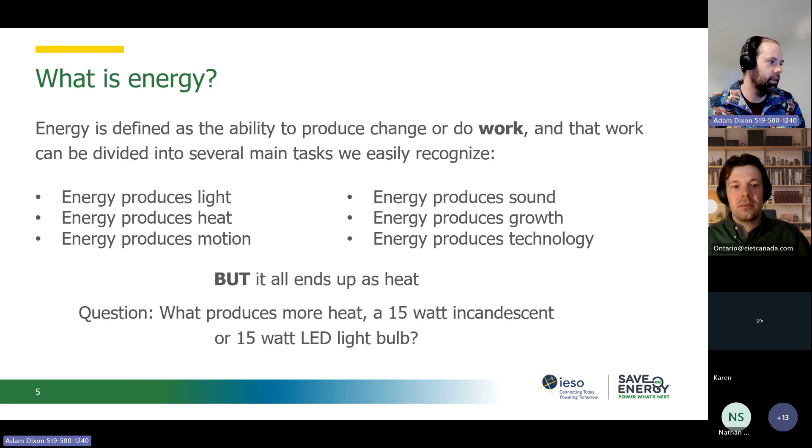Okay, so moving on. So I mentioned the law of conservation of energy: energy cannot be created or destroyed, only transformed and transferred. So this manifests itself into our energy systems here: oil burns to generate heat, the heat boils the water which turns to steam, the steam turns a turbine, the turbine turns an electric generator, produces electricity, gets transferred to your homes or your businesses, and then it powers the lights, and the lights give off light and heat in that example.

So that's one example of the whole energy system, and again, everything ends up as heat at the end of the day. Even at the first step here, the oil burns to generate the heat, there's losses in that system as well. So it's a big balanced system in terms of the higher level picture there.

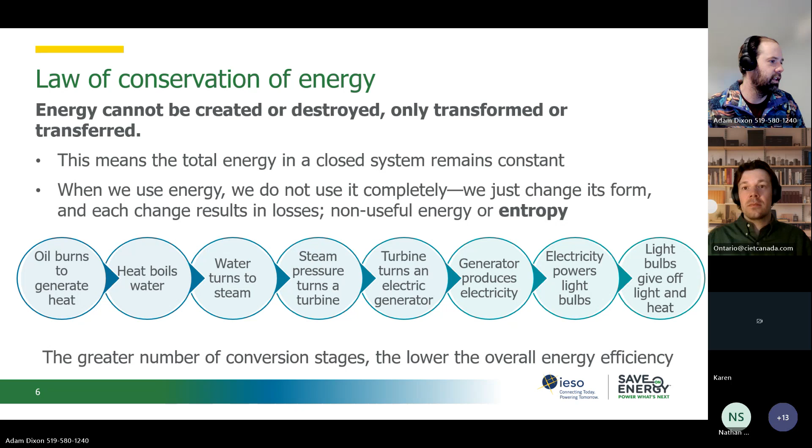There are other forms of that as well. So energy systems: there's the fuel getting burned, primary energy, power plant, it's then distributed to the end use. So there are losses at each step along the way. And actually, to account for some of these losses, if you look at your electricity bill, there is somewhat of a multiplier in there to account for how far away you are from the primary source of energy.

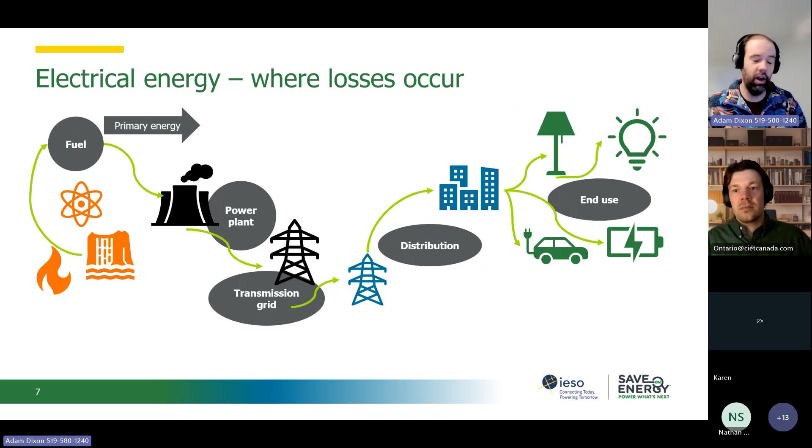So if you're ever looking at your energy bill and you see one kilowatt hours and you see another kilowatt hours and you're billed for the higher one, that is a bit of a true up. It's a simplifying of how it works, but a true up to account for those losses throughout the system.

So, different forms of energy. There are many different forms. The main two here are kinetic energy, which is energy of motion, energy in action, like the light from a lamp or the steam from a kettle, and potential energy, which is energy stored to be released, like energy from a battery or cutting wood for your fireplace.

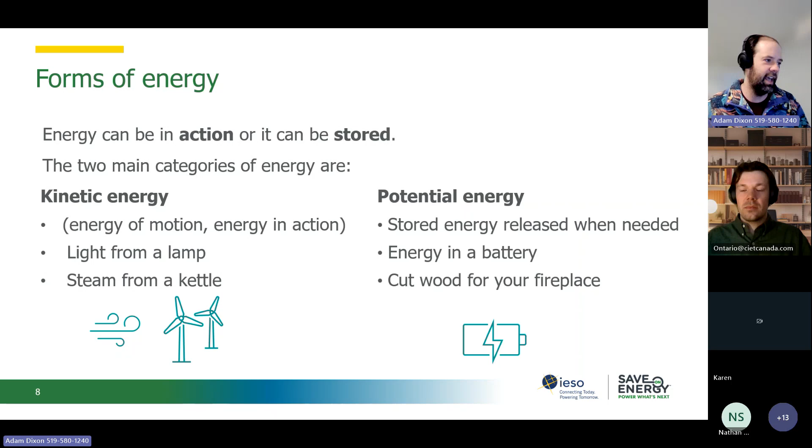The potential energy in the wood is the wood itself. When you burn it, the energy is released. That stored energy is released when needed, which can be as simple as when you're hammering a nail into wood. The hammer has potential energy in its mass, and when you swing it, you produce kinetic energy. I'll get to the final step of that equation at the end.

Kinetic energy can also be thermal energy, related to the temperature of an object and the total kinetic energy of its particles, radiant energy, or electrical energy, produced when moving electrical charges. That's probably the one people are most familiar with.

Then we have potential energy, such as chemical energy stored in the bonds between things, which is released, nuclear energy, and gravitational energy as well.

The final piece we're going to put together here is mechanical energy. I've tried, as much as possible throughout this webinar, to bring in simpler real-world examples as opposed to more complex energy system ones. So mechanical energy is the last one - it's the sum of the kinetic energy and the potential energy in a physical system.

Bringing it back to the hammer example: the hammer itself is the potential energy, then the kinetic energy is the swinging motion. The mechanical energy is when it actually hits the nail - the force applied to the nail to drive it into the wood. So summing those up gives the amount of force applied to drive that nail into the wood.

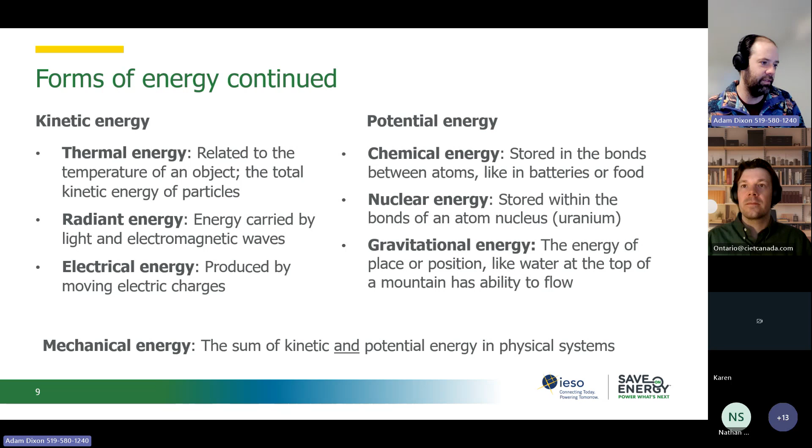Now what we're going to do is get into some more energy-specific terms you may have come across when working with energy in your building. I have a bit of a matrix here, built up over time, to dispel some of the myths and misunderstandings around energy in our buildings.

So we have a table here with two sides. We're going to build them up together and see how they relate to each other. One term you've probably heard of, whether at home or in your business, is kilowatt hours. Is anybody able to tell me what symbol, what function, goes between kilowatt and hours to get kilowatt hours?

Is it division, multiplication, addition, or subtraction? Someone feel free to speak up or type in the chat there. This one is oftentimes misunderstood.

Multiplication. Yeah, that's exactly right, David.

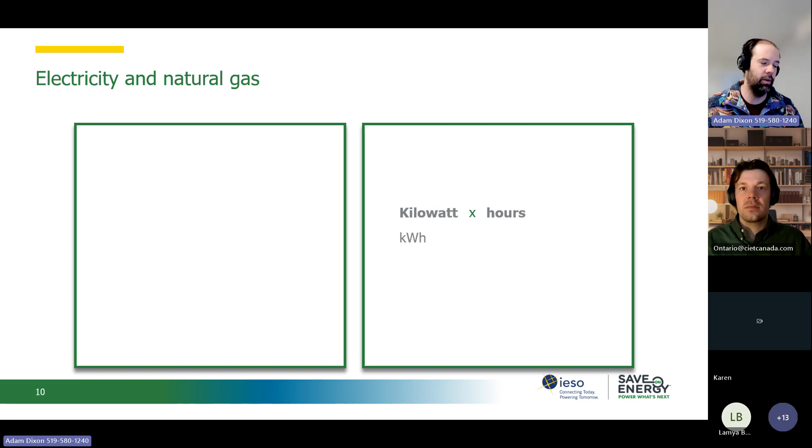Now, a kilowatt hour - oftentimes people equate kilowatt hours to kilometers per hour in your car, as a speed. It's actually not that; it's somewhat the opposite, but it is multiplied. It's kilowatts times the number of hours that the device or energy system is actually using electricity.

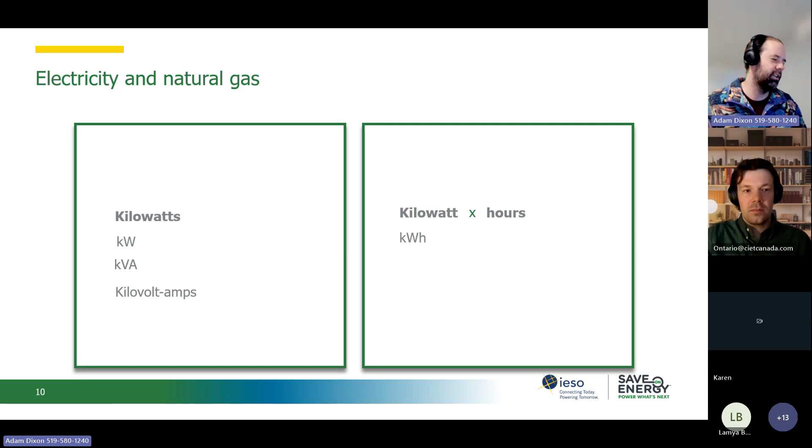This is another, I'd say more advanced thing you may come across on your energy bills. It's used to calculate power factor, which we're not actually going to get into in this course - it's a bit more advanced. So don't worry too much about kilovolt amps, part of this general, kVA. Depending how you're billed in Ontario, you'll see kilowatts and kVA, and you're maybe billed for whichever is higher, because the IESO or your local utility wants to have quality electricity. But I'm not going to get into the details of that right now, just to not confuse people.

So if you divide your kilowatts by your kVA, this gets your power factor. Power factor is designed to account for the losses in the energy system to get it from generation to your building. So without getting into too much detail, power factor is accounting for the losses in your building.

Next thing you may come across is horsepower. So 1 horsepower equals approximately 746 watts at 100% efficiency. If your motor is not efficient, it's not going to be 100%, you'll see a little bit less than that if you actually measure it. But 746 watts by definition is 1 horsepower.

So back on the right hand side, we have our kilowatt hours. This is actually our consumption - how much of something we are using. Also referred to as energy. Here, this is demand - the speed at which we need something. Essentially, I like to explain it as the size of the pipe required to get the energy to your building.

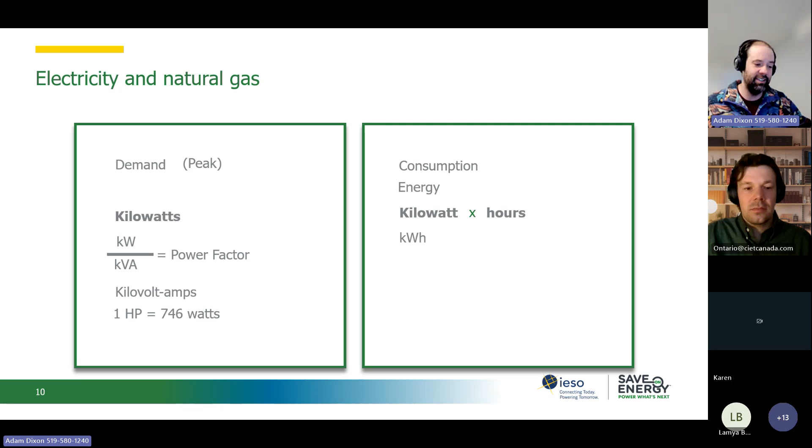If you look at your bill, and you're on anything above a commercial residential thing, you're going to see a peak demand. On top of your consumption in kilowatt hours, you are billed for your peak demand because you are influencing the size of the pipe that is required to get that energy to your building. It's also called power - you may come across that term. So the demand.

Electricity and natural gas - this is on the left-hand side. This is, I want someone to fill in the blank: this is how something, and on the other side we're going to have how something else. Anybody able to fill in the blanks there? So it's actually, as I've mentioned before, it's how much. And this one is how fast. And this is how much.

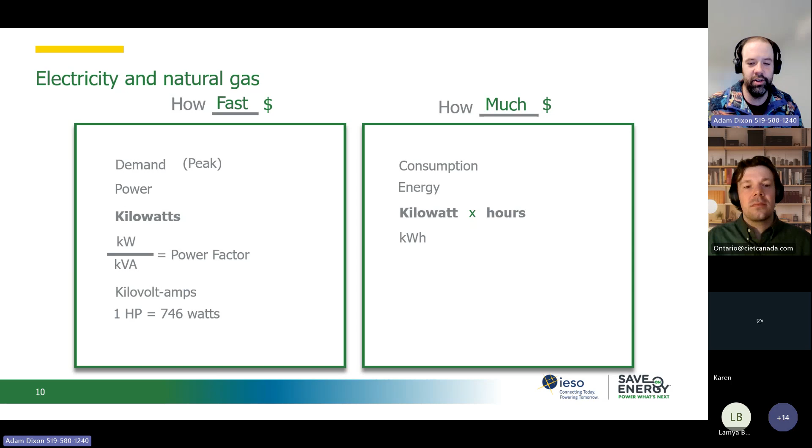A good real world example of this is an analogy I use - actually the other day, because people keep talking about AI in the energy world, I used ChatGPT to come up with some analogies for these things. So kilowatt hour, a good analogy is a water faucet. The kW, kilowatts, is the rate of flow at which the water is coming out of your tap. The kilowatt hour is how much water is collected - if you had a bucket underneath it, it's how much water you collect over a specific time. So another real world example to wrap your head around these things.

Moving on to when the price of that is determined, somewhat based on when you use it. On the kilowatt hours side, the consumption side or how much side, when you're residential, which you may be more familiar with, you have your time of use rates - your on-peak, off-peak, and mid-peak rates, so 3 different rates. When you get into commercial, industrial, Class A, Class B, it's a bit different.

It's more tied to your demand, and in your demand it also matters when that happens. Without getting into too much detail, depending when it happens, there's the 5 top peaks, as they call it. You're billed for your contribution to those 5 top peaks - the 5 top using days in Ontario, your peak demand, you're billed for that peak demand. If you are a Class A, Class B, or a bigger building, we're not going to get into the details of that - there's entire 1-2 day courses on how to understand those bills, so don't worry too much.

I would suggest going out and looking up how to do some training on understanding Class A, Class B billing—how fast, times how long, equals how much.

Often when it comes to energy, the 'how long' is actually the most important factor when controlling energy and getting into energy efficiency. Sometimes you can have a massively large load, but if it's not running for a large amount of time, it's not actually going to cost you that much.

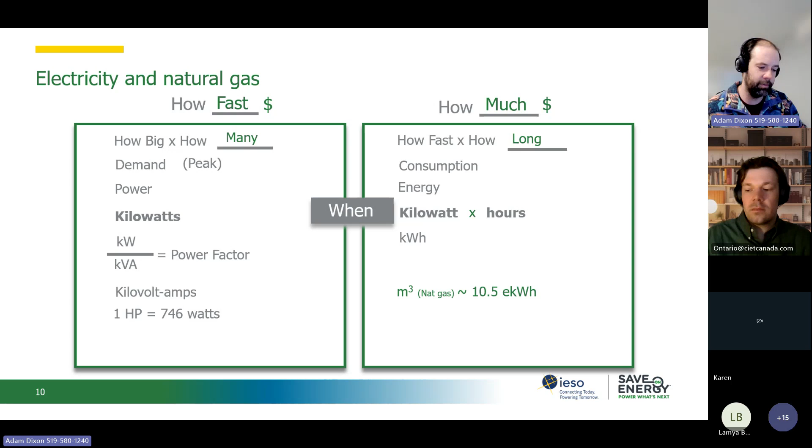Switching fuels here a little bit—I know we're mainly concentrating on electricity, but all the energy systems interact, so it's important to understand natural gas. In Ontario, you're billed in meters cubed, a volume of natural gas. In that one meter cubed of gas there's approximately the equivalent of 10.5 equivalent kilowatt hours.

One of the things that intimidates me still to this day is memorizing all the conversion factors between different fuels. Don't worry too much about it—there are lots of different tools out there nowadays to jump between them, and eventually over time you will memorize those.

So 1 kilowatt hour—another unit you may come across is a BTU, which stands for British thermal unit. Acronyms are one of the things that still to this day I struggle with—not just in the energy world, but in our world in general today. There's about 3,400 BTUs in 1 kilowatt hour.

The next units you may come across, depending on your jurisdiction: joules, kilojoules, megajoules, and maybe more commonly gigajoules. Often if you're outside of Ontario—in British Columbia, for example—gigajoules is how you see your natural gas on your bill.

Now the next thing—going back to the left side—we have 1 ton. You may have an air conditioner at your house that is about 3 tons, and that's 1 ton of refrigeration. That's actually the ton, if you're wondering, that comes all the way back to when we cooled our houses with blocks of ice. So 1 ton of refrigeration is the rate of heat transfer—it's not an amount of heat.

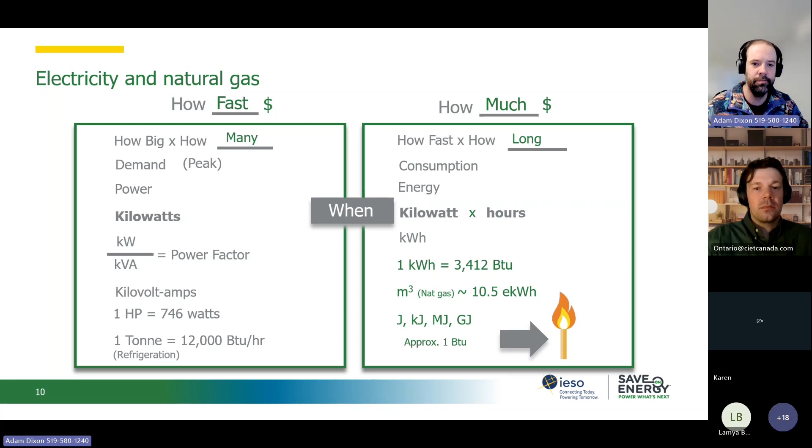So in order to generate 1 kilowatt hour—and I like to explain this because we often think of a kilowatt hour as a very small amount of energy, or even an expensive thing for the amount of energy we're getting. We talk about the price of energy going up, but to liberate the amount of 1 kilowatt hour of energy, you would have to strike 3,400 matches in 1 hour.

I forget the math on how many that is per second, but I don't think I could do 3,400 of anything in an hour. You'd basically have to swipe all those matches in one hour to make 1 kilowatt hour. So it's not necessarily as small a unit of energy as we think. I know we use a lot of them, and at 10 to 20 cents a kilowatt hour, that kind of justifies the price a little bit.

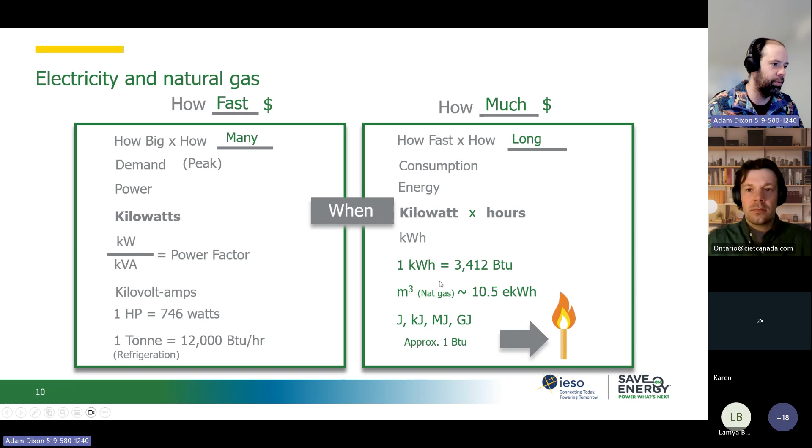Calculating power and energy is just another way of reading things, depending on how you like to look at it. I know that table can sometimes be confusing. Volt amps is volts times amps. Watts is volts times amps times your power factor. Your power factor, as we saw before, is watts divided by volt amps, and kilowatts is watts divided by 1,000. So power factor again describes the losses in the energy system, such as the electricity distribution system. I think we're quite familiar with that at this point.

Energy equals power times time, and kilowatt hours equals kilowatts times hours. I think the key, if you're going to dive into this, is to look at your house. You can get a lot of data from your utility on your house, and you can buy a lot of little things relatively cheap to track energy if you're interested.

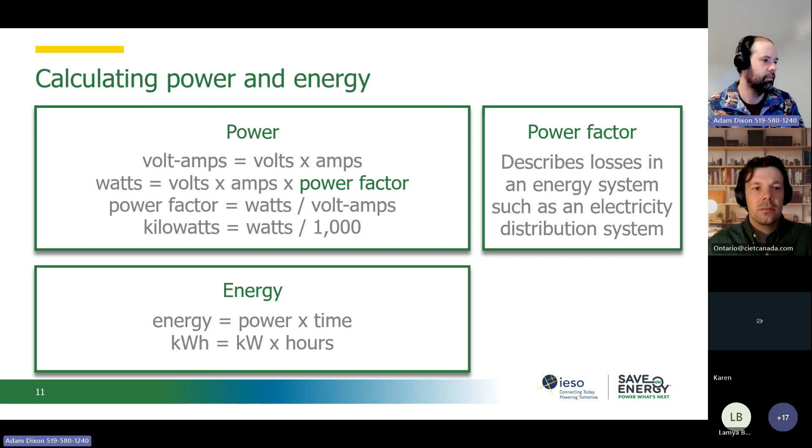I think I have it sitting here, or I might have moved it—a little power meter I bought a few years ago. It's about $40. I can plug it into my wall, plug my coffee maker into it, and measure electricity. I have another one that's a bit more advanced, about the same price though. It'll actually track the energy over time, so I can see the demand. There's also smart plugs and things like that to help control those hours. But concentrate on the hours if you're going to dive into analyzing any amount of energy in your house. I have a few analogies later to talk about that.

So units of energy, continued—I'm not going to spend too much more time on this. We mentioned horsepower, British thermal units, energy, joules per second. So it's speed—how fast and how much are the keys to that. Kilowatts is how fast, kilowatt hours is how much. If you're going to take anything out of today, and if you're new to energy or not confident in your energy literacy, that's something to write down.

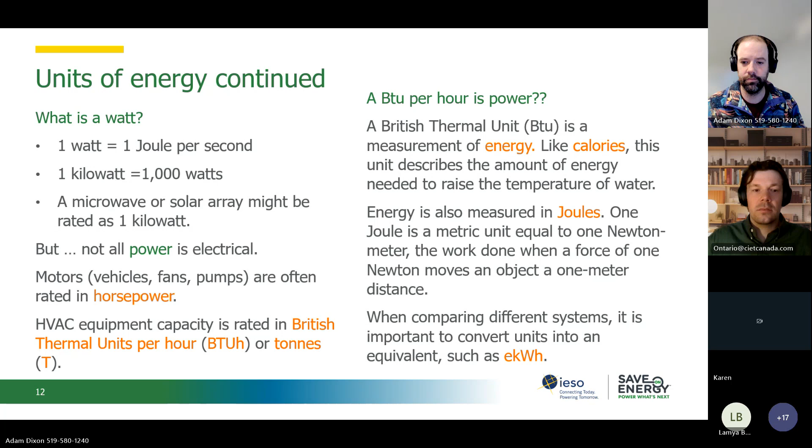We have a question in the chat asking if power factor can be described as another way of knowing the efficiency of a system. Generally, I'd say that's somewhat of a simplification, but yes—in the entire energy system from source to sink, which is your house, there is somewhat truth to that, but it's a little more complicated than that. There's no values on the power factor itself—it's a unitless conversion, a unitless number.

Demand is a little bit different. Typically it's in kilowatts, as we've mentioned, and what we want to look at most of the time is our peak demand. Peak is the biggest amount of demand we use in the building over one 15-minute period. Someone said 1 is ideal for power factor, which is correct. I think ideally in a larger building, anything over 0.9 is pretty good—that's what you want to look for in your building. If you're below that, the utility may contact you to do some things to deal with it.

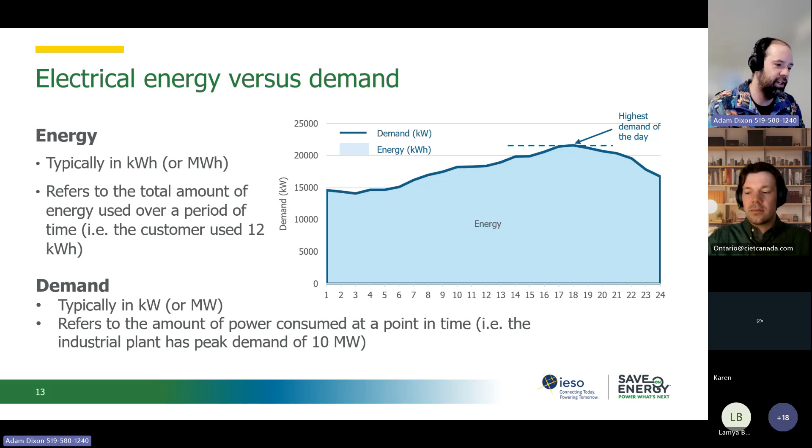So I have a little bit of a problem here. We're going to go through this to understand how demand affects your energy bill. It's not just how much you use, it's how fast you use it, because that's how the system needs to adapt to supply energy to your building. You may be hearing more about this in the news regarding adaptability of the grid as we electrify our buildings and add more EV chargers. As we become more reliant on electricity in Ontario, demand is becoming more important. So let's understand the cost and price of electricity.

So what happened there? Upon investigation, they used 15 kilowatt hours more at 10 cents a kilowatt hour, which would equate to about $1.50 extra in charges. But they had a 60 kilowatt heater that jumped on at a certain point for 15 minutes, and that set their peak demand. So they had 60 kilowatts and were charged $6 a kilowatt.

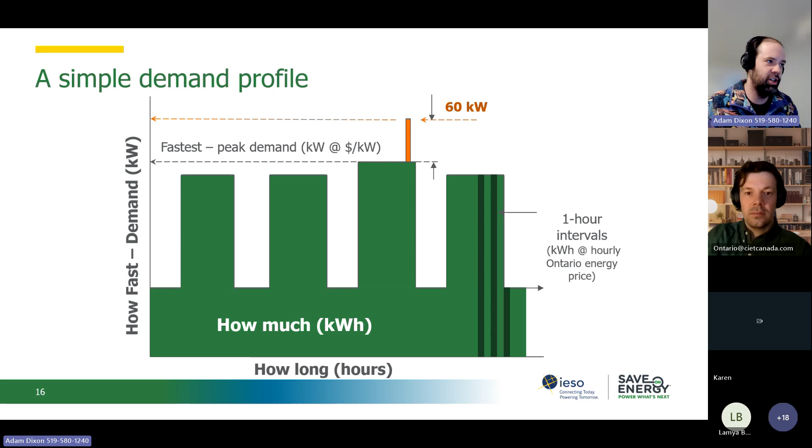If it's actually done in one of these valleys, it's kind of a non-issue - you'll pay a little bit extra for the actual usage, but you won't pay any more for the demand. So being careful of when large loads come on in your building is one way to manage energy in your system. On a residential or small commercial level this isn't much of an issue, but in bigger buildings this is a major issue - the majority of your bill is actually on your peak demand.

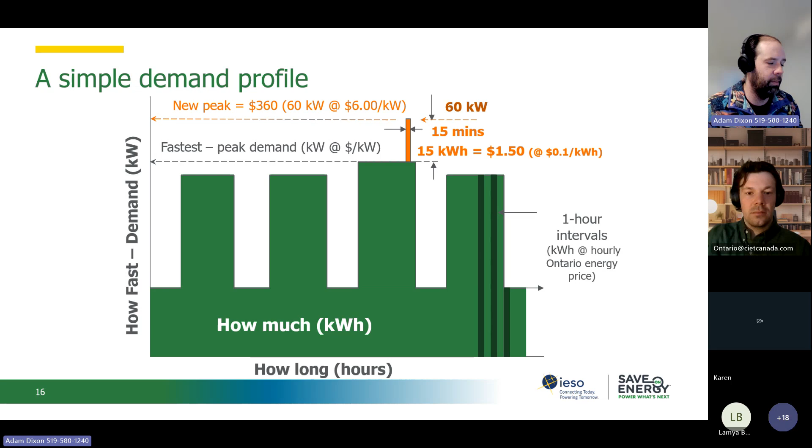So 15 minutes, 15 kilowatt hours, that's $1.50. But the new peak is $360 - 60 kilowatts at $6 per kilowatt. That's where we get dinged, even if it's only on for 15 minutes, that one little heater. So then we have to decide - was that necessary? Hopefully that makes sense to everybody on how, if you're in a larger building, you might offset things to make sure you don't shoot up your peak.

On the same token, though, that can be used to reduce your bill. If you know everything starts up at the same time in your building, there may be ways to offset those things. One of the myths is that startup of facilities often sets the peak demand - no, the peak often also occurs midday or at the end of a shift, or there may not be a significant one at all. So you may not have a drastic peak, or it may occur midday.

Oftentimes it's tied to the weather. Historically in Ontario, peak demand happens in summer because we cool with electricity. In winter, we're a majority heating climate, heating mostly with natural gas. So it often occurs in the middle to later afternoon at the hottest point of the day, when air conditioning systems are working hardest. In an industrial situation, that's almost always the peak demand, because if your process generates a lot of heat, your air conditioning works even harder to evacuate that heat from the building.

So it's not always at startup. People think that, although there are opportunities there as well.

Let the profile speak to you. If you're looking into this, download some data from your utility. Oftentimes you can get interval data, your 15-minute or hourly data, to analyze this. You can plot it on a graph using Excel or other tools out there. Let it speak to you, see where your peak demand is hitting, and see if you can do something about that or move it back.

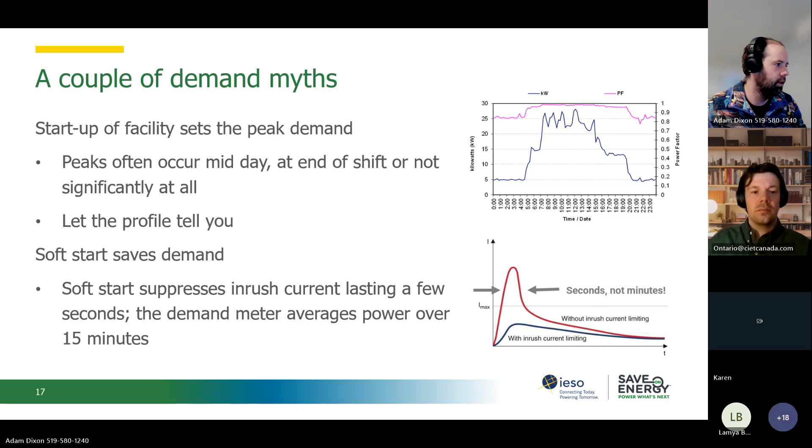So another real world example, looking at kilowatts or demand versus time: what uses more energy in your house, a clock on the microwave or the actual microwave for cooking?

Actually, oftentimes it's the clock that uses more energy over the year than the microwave itself. You'd have to use the microwave about 24-25 minutes per day to equal the amount of energy the clock uses over time. It depends on the wattage—everyone's different. You may have a microwave without a clock, in which case this example is irrelevant. Depending on the wattage, you'd have to use it 20-25 minutes to make up for the clock.

If something's running continuous—and continuous loads are the killers in electricity—anything that's a continuous load costs about $2 per watt per year. So if you have a gaming system in your house, it's got a big suck of what they call phantom energy.

Someone asked: could you elaborate on how the demand meter averages over 15 minutes? Does it take samples every second? I'm not sure off the top of my head, but I believe it takes samples every 15 seconds and averages that over the 15 minutes.

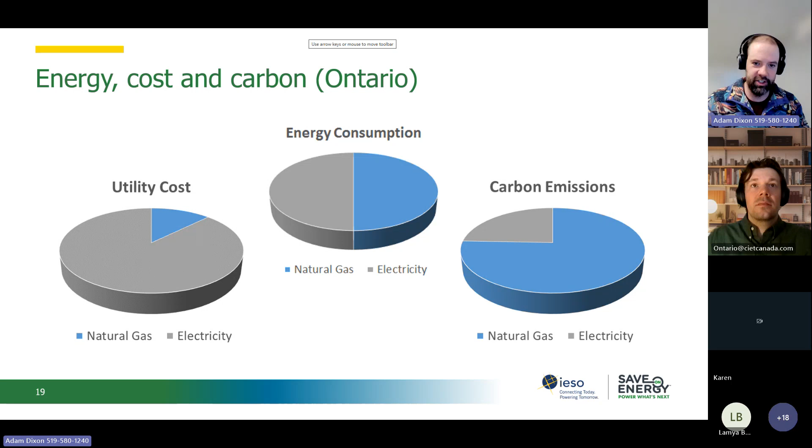But when it comes to carbon emissions in Ontario, your natural gas contributes way more to your carbon emissions in your building than your electricity consumption. So depending on your organization's goals, backing up to a higher level energy management system: if your goals are to save money, you need to address your electricity consumption. If your goals are to address carbon emissions, you need to address the natural gas in your building. Those are the two ends of the spectrum. The reality of what you want to do in your building is probably somewhere more in the middle. If you're diving into this, there are many more training courses than this one hour here on energy management that can give you more details. Unfortunately, in just an hour, we're going to touch the surface on a lot of these energy management concepts.

So energy and carbon. This reiterates the point before that your electricity is very low carbon content, natural gas is much higher carbon content. Understanding these concepts allows you to align what you're doing in your buildings with your goals. So 1 meter cubed of avoided natural gas avoids the emissions of 1.8 kilograms of carbon dioxide. 1 kilowatt hour of avoided electricity consumption avoids anywhere from 0 to 0.6 in carbon dioxide reduction.

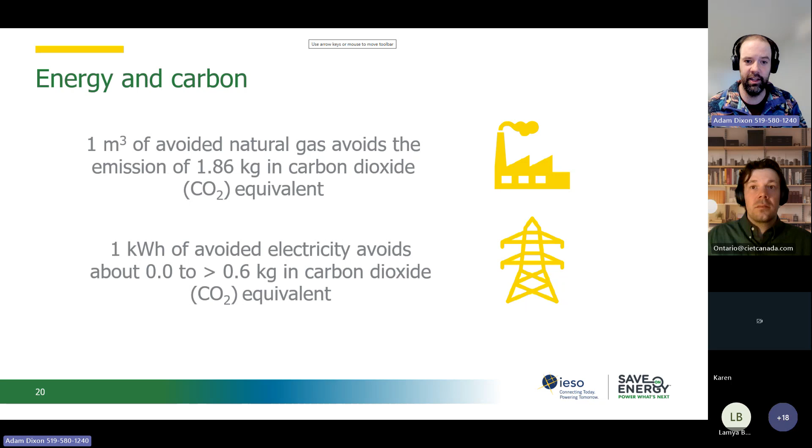There's a range there because the grid in Ontario, the grid mix, is changing constantly depending on what's going on in the province. If we have higher demand, we may need to turn on some of our natural gas fired plants in Ontario, so the carbon content jumps up a little bit, but it's still very low. That's why electrification, which you may have heard of, is a hot topic right now in Ontario, because it increases your efficiency, as we'll see later, using things like heat pumps, but it also avoids carbon really rapidly. You can reduce your carbon emissions very quickly simply by electrifying your building.

So what is efficiency? Energy efficiency, I've mentioned that a number of times. It's the useful output divided by the input times 100. And the useful part is very important there. That's where lighting comes in: if it's a 100-watt light, you pay for 100 watts, but you only get anywhere from 2 to 20% of that as actual light. That's the useful part of it relative to the function of the device.

The question there, Satwan, well, maybe I'll expand on that in a minute. If you're looking at any of these systems, you may be a bit surprised that a compressed air system is probably one of the least efficient devices out there. If I'm remembering correctly, you're paying about $4 a kilowatt hour to get energy to your building from a compressed air system. So it's a very inefficient system, and it's oftentimes an area to look at in your buildings in order to increase efficiency.

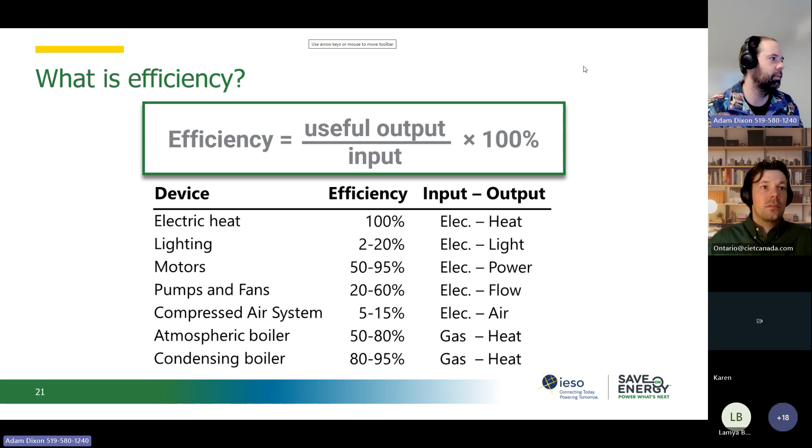Yeah, it is the heater. A lot of people talk about electric heaters as being inefficient, but they're actually very efficient - 100% efficient. You get 100% of the input put to heat. It's just historically, electric heat is expensive. That's the disconnect I've seen over the years - it's not inefficient, it's very efficient. Electric heat is the most efficient, it's just the most costly in your buildings.

And when you get into heat pumps, it's even more efficient. We have greater than 100% efficient heat pumps, much higher. If that seems weird to you, I'll explain that in a little bit as well.

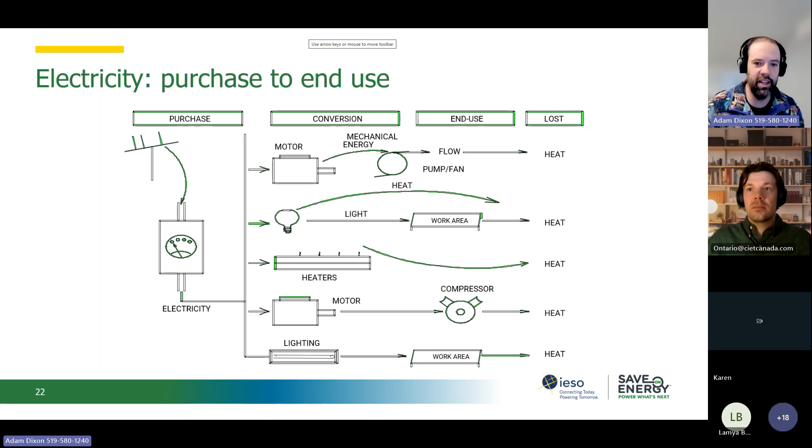So this is where we're going to dive in. We're going to leave kind of energy basics - understanding kilowatts, kilowatt hours, meters cubed - and go to a 3-step approach, a foolproof approach I think, to understanding and reducing your energy bills and your carbon footprint as well.

The first step is actually the first two steps: it's waste and efficiency, and then supply. If that doesn't make sense to you, don't worry, I'll give you some really simple ways to deal with that. So number 1 is reduce your waste, number 2 is increase your efficiency, and number 3 is deal with the supply.

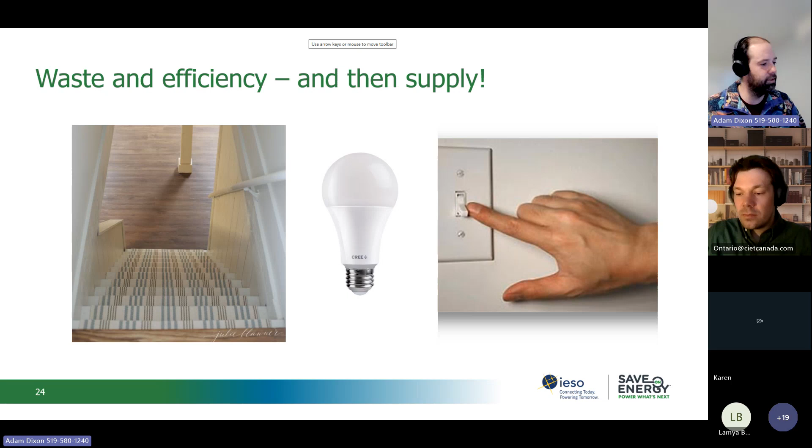The reason I do this is that it aligns with full decarbonization or net zero plans, but more importantly, as you move along through these steps, the cost increases. So if you do the low cost items first, you don't need to purchase as many of the big, higher value items at the end of the day. Some of those items are very cool - I love a nice PV system, but I don't want to buy more than I need.

Maximize efficiency: the lower cost is operating conditions - good maintenance. Make sure you have a clean furnace filter at home. Even if you have a high efficiency gas furnace, you want to keep that furnace filter clean, because as the filter becomes dirty, your furnace will ramp up the demand or wattage on the motor to keep the air flowing through it, and will actually use sometimes 3 or 4 times as much energy in that system. So very important maintenance.

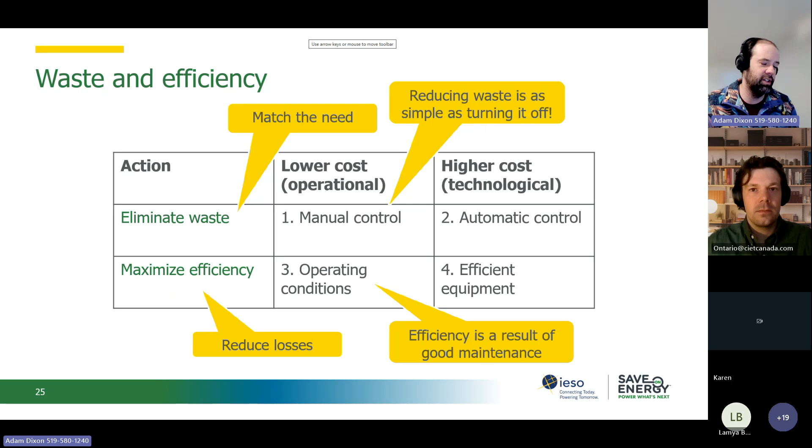If you don't have a high efficiency one, your furnace will just run a lot longer to maintain the airflow, which also leads to other maintenance issues - fans and motors breaking down over time. So the higher cost option here is actually replacing the equipment. But oftentimes, in certain situations, using older, less efficient equipment if it's run efficiently is better than new efficient equipment run inefficiently.

So eliminating waste, reduce usage: step 1, turn it off. Turn it down, and then control it. It's pretty simple to me.

Fixing leaks, turning lights off, stuff you don't need - make sure you do that. Turning it down: thermostats, water temperature you may not need at home. Specifically, you may not need your water heater running quite as hot as it is. You may actually not need your thermostat quite as warm or as cold as it is. There's lots of information out there about where the human body likes its temperature to be based on the seasons.

You can actually adjust your thermostat by a few degrees, which is about 2 to 3% in energy on heating or cooling for every degree you change. So you can adjust it and save significantly by just going with the rules of thumb on what the human body can accept. If you do like a certain temperature though, you may just have to grin and bear it and say, this is what I'm going to pay for it.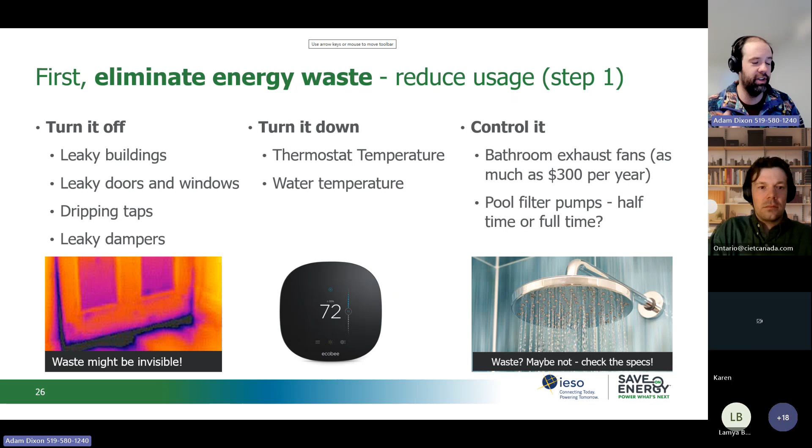Control it - you can put timers on things, smart plugs, aerators on your water. Even a low flow shower head, low flow taps are very, very important. They save you water, which we don't typically discuss because it's not a typical energy measure, but they also save you on your water heating.

So next is maximize efficiency. Again, those operating conditions, change filters, lubrication, controls, things like that. Make sure everything's running how it's supposed to be.

Oftentimes when you walk around your house or your building, listen for noises. Noises are one of the number one indicators of something going wrong. If you're walking through the grocery store, for example, you'll often hear the compressors on the refrigeration section running on overdrive, a rattling whether it's below or above. That's probably a compressor or some sort of filter that hasn't been cleaned.

Oftentimes, if you take off that grate on the bottom or top of the refrigerator and vacuum it out, that can solve a lot of problems with your refrigeration systems in your house or a grocery store. So I always like to do all of these things before I have to go out and buy new equipment. But on maximize efficiency, you can also go out and buy something, since some things become beyond repair. You maybe need to go buy a new refrigerator, a new furnace, a new air conditioner, things like that.

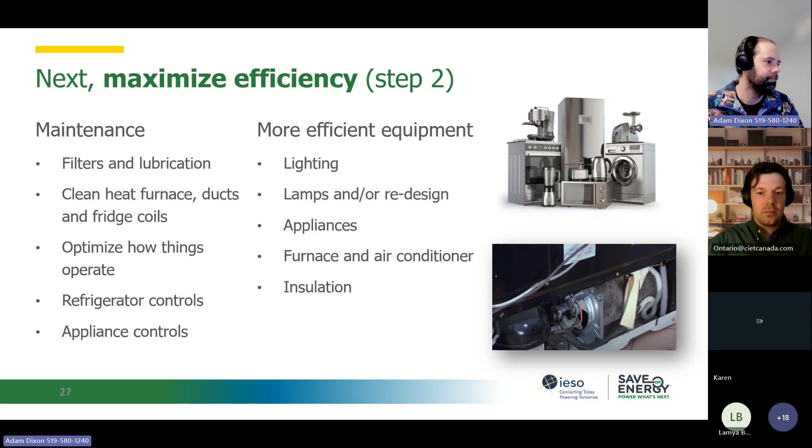Then we can do optimized supply. This is where we get into some of the older cool technologies and some of the more leading edge technologies. So if I have, say, a 30 kilowatt demand in my house, but I can reduce that to 20 kilowatts by simply turning things off, that means I don't need to buy a 30 kilowatt PV array to account for my energy in my building.

So I can buy a much smaller system, or maybe more relatable, I did this in my house. I did a bunch of air sealing and insulation when I was buying a heat pump. I had a massively oversized natural gas furnace and fireplace, and they were going to put in a heat pump to match that. But I increased the efficiency of my house and was able to put in a much smaller, much cheaper heat pump at the end of the day.

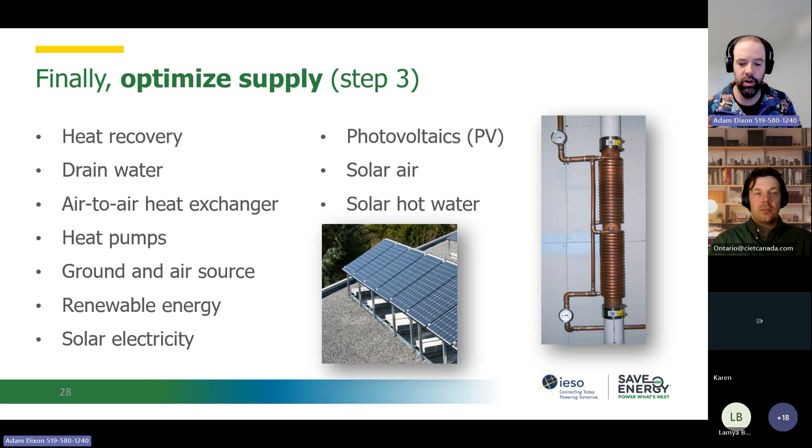And these benefits go well beyond energy and carbon. There's the direct and indirect energy savings, but there's also usually with energy efficiency increased comfort, quality, productivity, and safety.

An example, in a warehousing situation, we worked with a warehouse where we did an LED retrofit to analyze that, and it actually improved the accuracy of the pickers because the quality of the light was so much higher. They were using those old yellow halogen lights, then switched to LED lights, and the employees were vocal about how much better it was to work in the warehouse. They were able to pick more accurately, so it increased productivity, and hopefully in that business there was somewhat of a profit sharing with the employees tied to that as well.

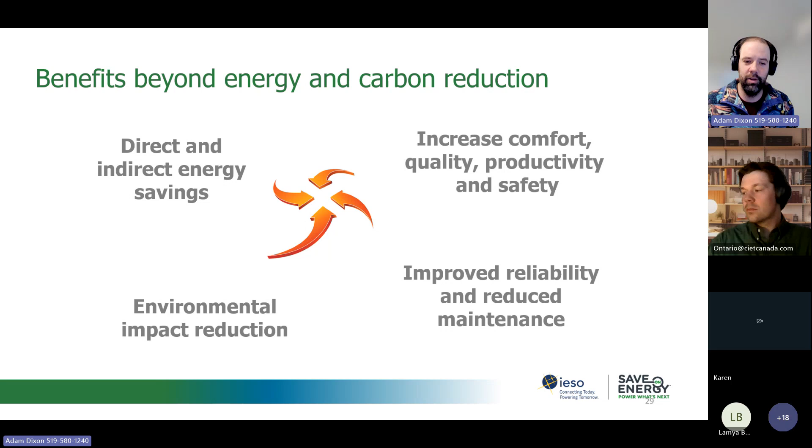In the real world, people work with this every day, benefits beyond energy. An example is the tires on your car. You want to make sure those are fully inflated. First of all, it increases the efficiency of your vehicle, you don't want to burn more gas than you need to, but it also increases safety. There's a safety element to keeping your tires fully inflated. So it's not just energy and carbon, there are other issues that come along with it.

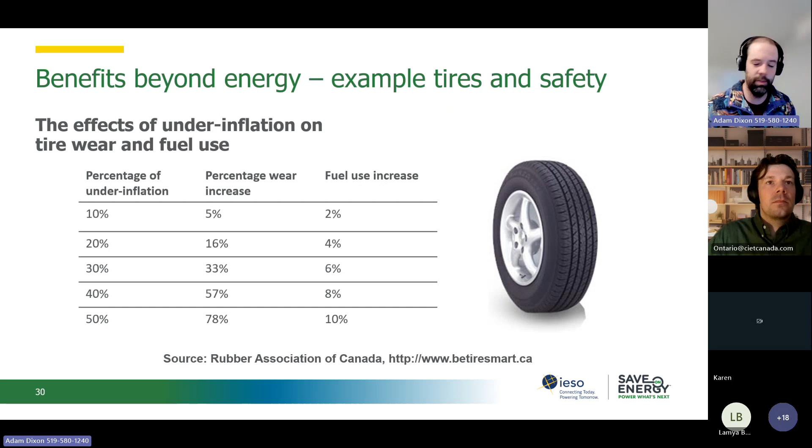Historically, way back, it was always like, oh, energy efficiency, you're the guy that's going to come in here and tell me to put a sweater on and freeze in the cold, turn off the lights and work in the dark. No, it's working at a comfortable temperature with the right amount of light, but getting that heat, cooling, and light to your space in the most efficient way possible.

So for the last 10 minutes here, we're going to talk about heat pumps a little bit. Heat pumps are a hot topic right now. There's lots of incentives out there from different programs to put heat pumps in. They are a good way to maximize the efficiency in your building.

Again, do the first step of eliminating waste, and then go in and put a heat pump. There is some schools of thought that if your goal is carbon reductions, just jump in there right away and do a heat pump, which will achieve most of those goals. But again, you're going to spend a lot more capital up front to do that.

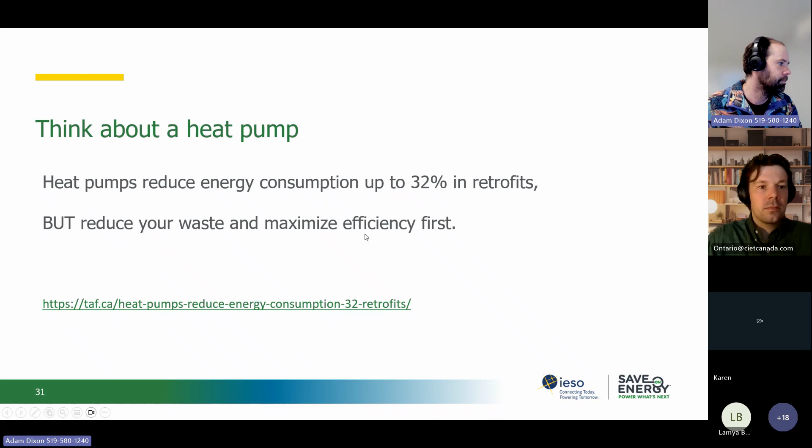So how a heat pump works. A heat pump is basically an air conditioner in reverse. So it runs the cold air... sorry, I'm not explaining this well.

I'm going to give you a good real world example. When you spray a can of aerosol like hairspray, or if you're a cyclist, you have those CO2 cartridges you inject into your bike tube, and all that air comes out, the canister is freezing cold. That's the air conditioner part of a heat pump. If you were able to force that air back into that canister, which you can't really do, the temperature would go back up to the temperature it started out at. So as things change, expand and contract, they produce hot and cold temperatures. That's how a heat pump is able to do that.

A heat pump often has efficiencies expressed as a coefficient of performance, which you'll see as 2, 3, 4 - akin to an efficiency of 200%, 300%, 400%. The reason we can have efficiencies above 100%, which may seem counterintuitive to the laws of thermodynamics, is because we're not converting energy, we're just transferring energy from one medium to another. So for every kilowatt of electricity driving the compressors and motors, with a COP of 3, you're able to get 3 kilowatts of cooling - 3 times more than the energy put into it.

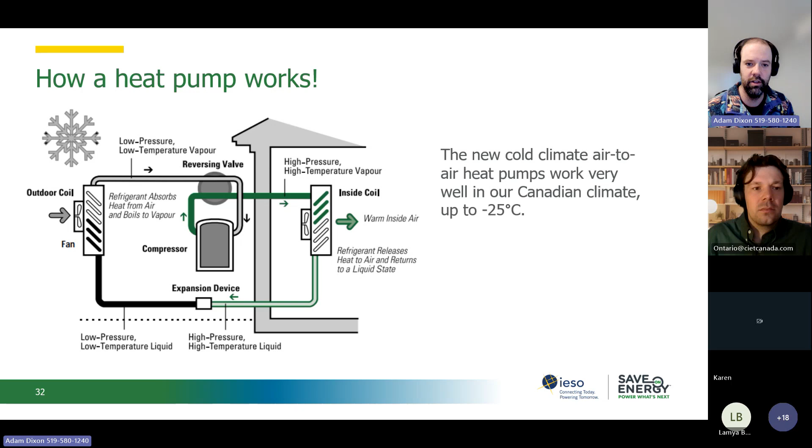In my house, I left in my old furnace. There were reasons - decision making - that I'm doing a renovation in 3 to 5 years, so I didn't want to spend 20 grand right now on electric backup and a full heat pump. So I left in my natural gas as my backup, and I shut off my heat pump. I've done the analysis on the cost-benefit ratio - I shut it off at -12. So it definitely does degrade over time.

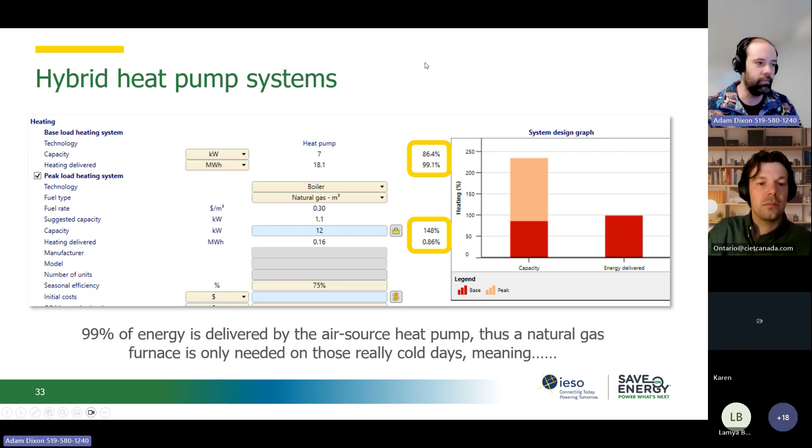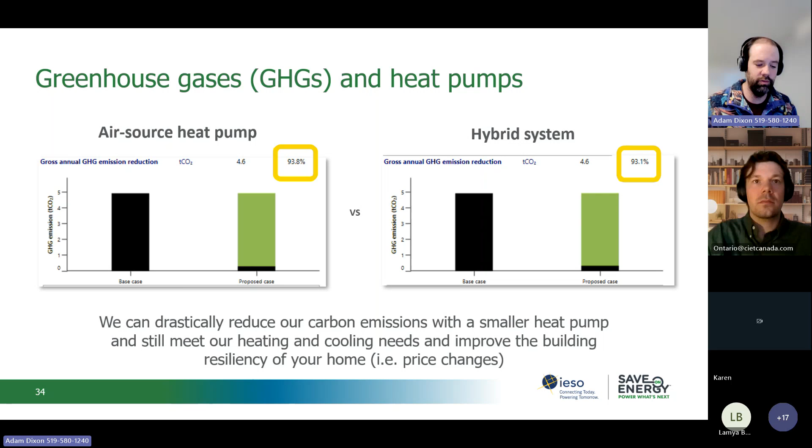Now, this analysis I did was based on shutting my heat pump off at -20. I've adjusted that over the year since I've had it in order to reduce my bills as much as possible. So again, in terms of carbon emissions, the difference between those two things: the air source heat pump with pure electric backup gives a 93.8% reduction in carbon. But if I do that hybrid system, I still have a 93.1% carbon reduction - so only a difference of 0.7% in carbon reduction, very very small. Now if I was to go net zero in my building, the amount of PV or carbon offsets you can do to further reduce your carbon - I only need a small amount of those because they're relatively costly.

So a couple other benefits of heat pumps, going beyond energy: if you do a full heat pump, no more fossil fuels in your building, no more risk of carbon monoxide poisoning. Indoor air quality is improved anytime you're not burning anything. I know there's been a lot of information come out the last few years specifically about natural gas stoves - the air quality in your house can deteriorate.

Lower insurance rates - if you don't have a fossil fuel burning, if you don't have anything burning, you can potentially have lower insurance rates. Then oftentimes you do have to upgrade your electrical panel to do some of these things, depending on your situation, but there are other benefits. If you have to do it, you can anticipate further things down the road on maybe your net zero journey.

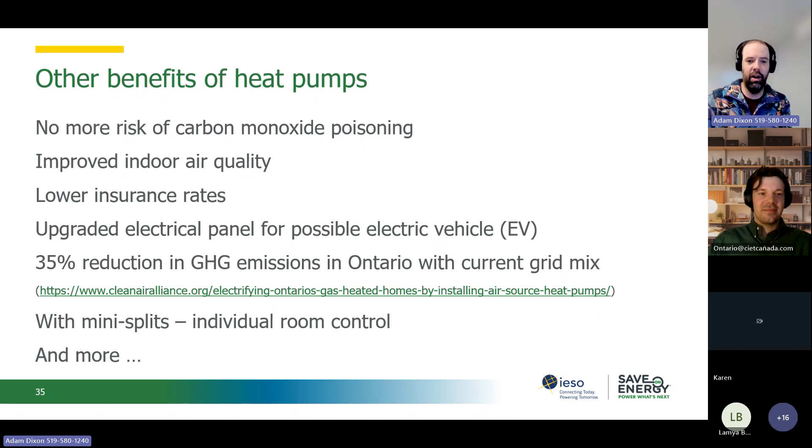We've kind of talked about the carbon reductions. And the last thing with mini splits is one of the systems where you have individual room control. You oftentimes see this at a hotel, or maybe some newer homes or homes in Europe and Asia - they have individual heat pumps in each room, so you can control this. It's very handy. My in-laws have a house where the main floor is done with a central heat pump, and all the bedrooms upstairs, they have five bedrooms, each have their own mini split. So when we go stay with them, we can control our room - my mother-in-law likes it at about 10 degrees C to sleep, my wife doesn't, so we can keep our room at maybe 17-18, and they can keep their room at 10 degrees. Quite handy.

The main thing I wanted to get to is online resources - there's tons of them out there. For heat pumps specifically, I've put a link to a specific channel. It's a UK-based company, but I find they explain heat pumps and all this stuff very efficiently in 7-8 minute videos. I don't typically like to plug specific companies, but since they're removed from our context here in Ontario - they're in the UK - I think it's a good resource to learn about heat pumps, where they can go right, where they can go wrong. They go very high level if you're not a technical person, and dive into the super technical things as well. It's a very good resource, as well as many others if you just Google heat pumps.

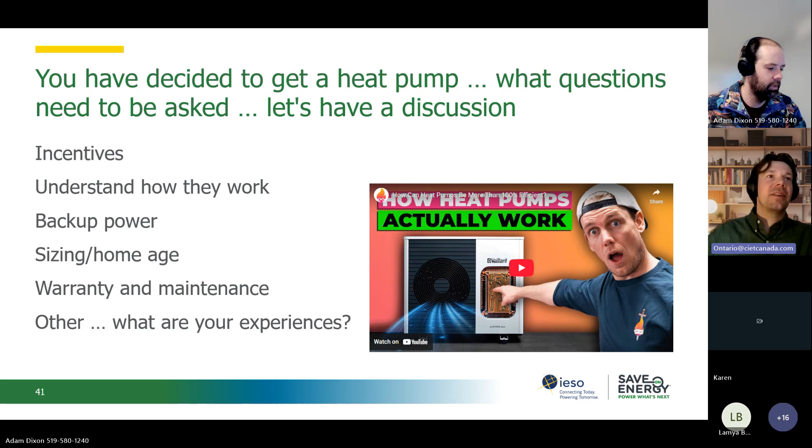I know I crammed that all in there in the last couple minutes, but I think we're at time, Alex. Yeah, thanks Adam, thank you for setting a really solid foundation for us. If you wouldn't mind taking us back to the green slide.